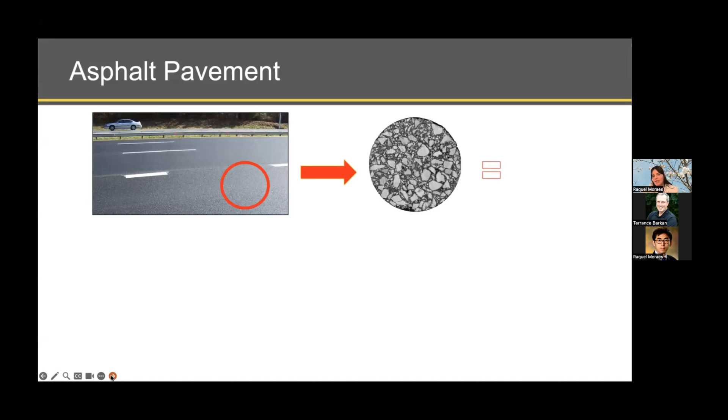Before starting, I would like to clarify some of the names I'll be mentioning today in the presentation. I would like you to see on this picture, this is a road that you drive on every day, right? So you see here this is what we call the asphalt pavement. If we zoom in on this asphalt pavement, you would see something like that, where you can clearly see a black component and several rocks. And this is what we have, when we say in the mix design, what is used to build a road.

These are the 5 components used in an asphalt pavement. We have the black component, that is the asphalt binder. We have mineral filler, 2 types of aggregate, fine and coarse, and air. When I mention today what was evaluated, I'd like you to understand that we incorporated the graphene into the black component of the asphalt pavement, what we call the asphalt binder. So when I mention what was evaluated, we included the graphene products into this component here, that is the asphalt binder.

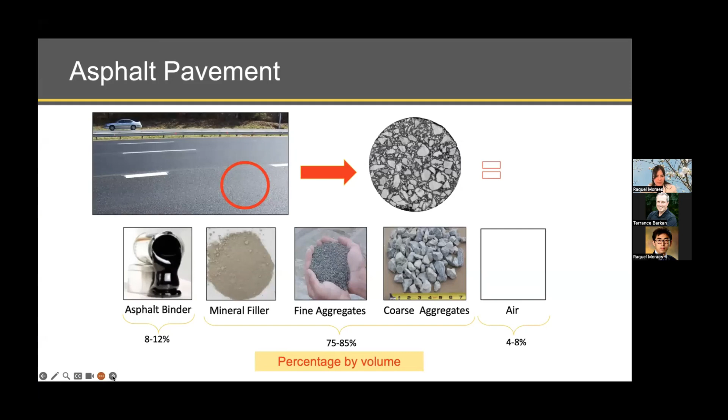The materials evaluated in this study were 1 base binder with a performance grade of 64-22. We evaluated 4 different graphene products at 3 different dosages, 1, 2, and 3. Here we have an illustration of the products utilized, and we call these additives 1, 2, 3, and 4, so we cannot disclose any product name.

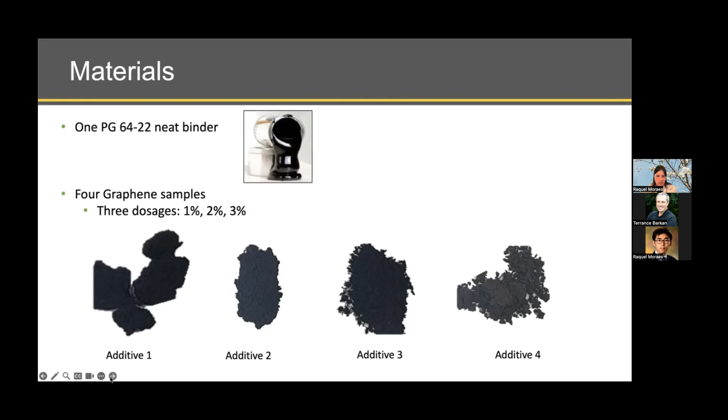Here we have the testing plan used for phase 1 evaluation. I would like to clarify that the whole goal of phase 1 was for us to become more familiar with how these products work and how they can be worked with in the lab. We also use a standard Superpave grading system to evaluate the behavior of the product, so we want to initiate our knowledge on the product before moving forward with other steps to perform a more complex evaluation of the additives. But before moving to that, we need to acquire the basic knowledge of how these products work and how we can work with them in the lab, and so forth.

So you can see here we have 1 asphalt binder, and for each graphene product, we evaluate 3 different dosages. We evaluate the material when we call it unaged, meaning we have the additive, we blend it with the asphalt binder, and we evaluate properties of that material without submitting the final blend to any type of oxidative agent. Then we perform 2 types of aging, and I'll be discussing this in detail every time I disclose the results obtained for each of the testing. We have what we call a short-term aging and a long-term aging. So in synthesis, what we evaluated here was the rheological properties of the asphalt binder modified with the graphene additives.

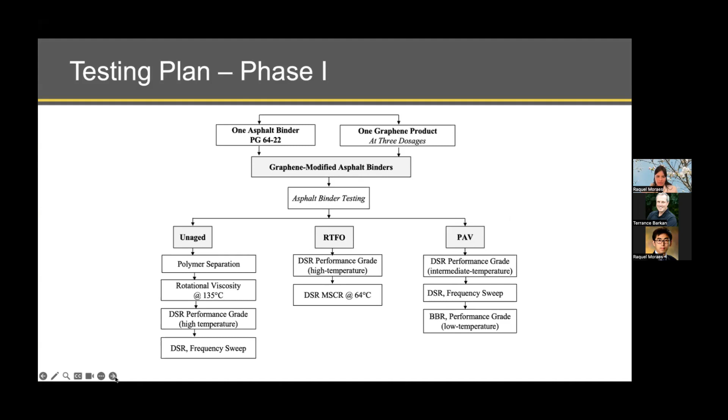The first test we evaluated was the storage stability test. It's an ASTM standard used to evaluate the tendency of a polymer to separate from an additive that is incorporated into the binder.

Following the storage stability test, we perform a softening test to see the tendency of the specific additive to be separated from the asphalt binder. The test is pretty simple.

As you can see in this illustration, we have the blend of the asphalt binder with the polymer or additive, in this case graphene. The materials are stored in a cigar tube, an aluminum tube, as shown in this picture. After conditioning at cold and room temperatures, we separate the top and bottom portions of this tube and evaluate the properties of the binder on top and bottom.

The property mentioned was the softening point, as you can see here. What is the softening point? It's an indication of the fluidity of the binder, meaning the temperature where the binder will start to flow. Why is this property important?

Imagine we have a pavement located where the environment temperature is 40 Celsius. We want a binder that has a softening point higher than 40 Celsius, meaning that material is not going to be soft at that specific environmental temperature.

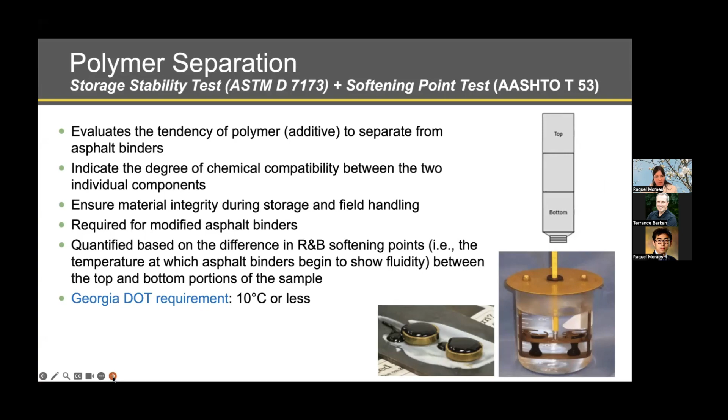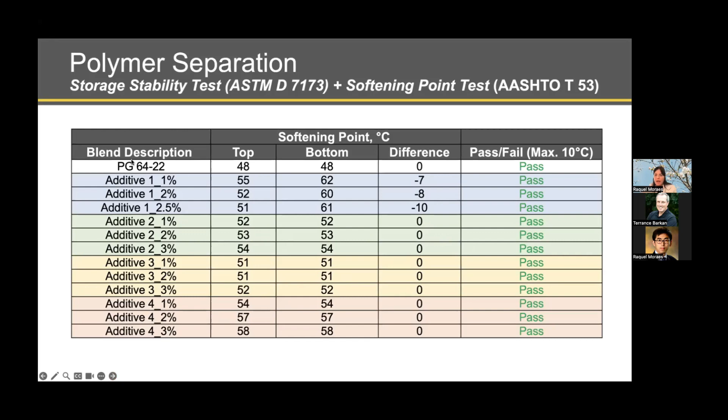As you can see in this table, for all the additives at the three dosages evaluated, none of them give a difference between top and bottom portions higher than 10 Celsius. For additives 2, 3, and 4, all show actually a difference of 0, so no separation. The only product that showed a higher tendency for separation was additive 1.

Now I'm going to cover what was evaluated in terms of rheological properties of the blend of the asphalt binder with the additives. We use what we call the Superpave Performance Grade system protocol for evaluation of these binders.

Basically, the system targets four specific properties or behaviors to be analyzed for the materials: production, rutting performance, fatigue cracking, and thermal cracking. For each of these targets, we have a specific testing protocol, aging protocol, and thresholds that are evaluated to grade a specific asphalt binder.

For production temperature or production properties, we use a rotational viscometer at a temperature of 135 Celsius. For evaluation of rutting properties, we use a dynamic shear rheometer, considering the material at the original state and after a short-term aging in an oven.

Then we evaluate fatigue cracking, also using a dynamic shear rheometer, but now the material is long-term aged. Then we evaluate thermal cracking, the behavior of the properties of the asphalt at lower temperatures, for which we use a bending beam rheometer, with the material also long-term aged in an oven.

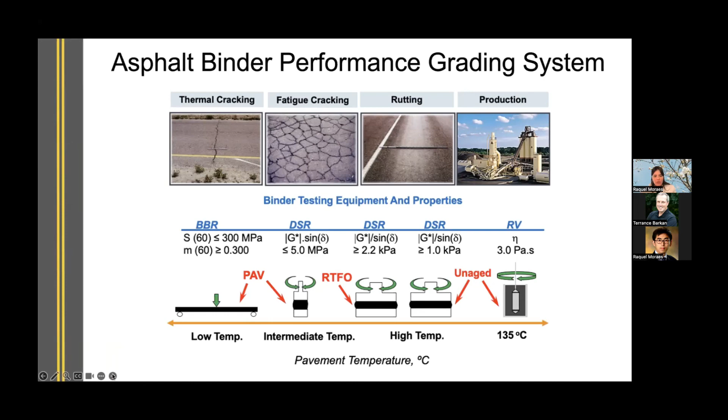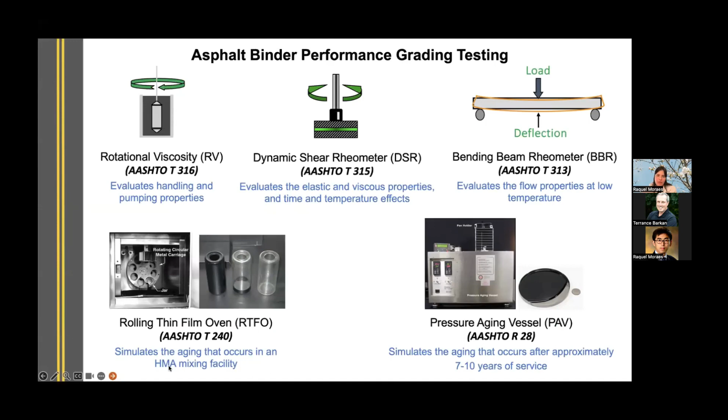Here I will show you the testing apparatus for each of the properties previously described. For rotational viscosity, we use a Brookfield rheometer, and the test is performed in accordance with AASHTO T316, where we evaluate the overall handling and pumping properties.

This is an important property we always consider evaluating, especially with additives, because we want to see how the workability of the binder changes after incorporation of the additives, and whether this would somehow differ from what is expected as common behavior in a plant.

Then we use the dynamic shear rheometer, AASHTO T315, to evaluate both the elastic and viscous properties of the asphalt binders at different times and temperatures. The bending beam rheometer per AASHTO T313 was used to evaluate flow properties at low temperatures.

Below in the slide, you can see the two aging protocols considered in the study: a rolling thin film oven per AASHTO T240 that simulates the aging occurring in a hot mix asphalt mixing facility, and the PAV, pressure aging vessel, per AASHTO R28, that simulates the long-term aging of the pavement after being exposed, let's say, between 7 and 10 years on a road.

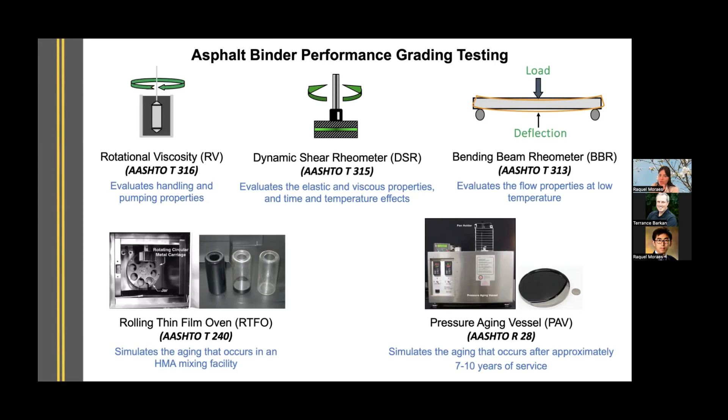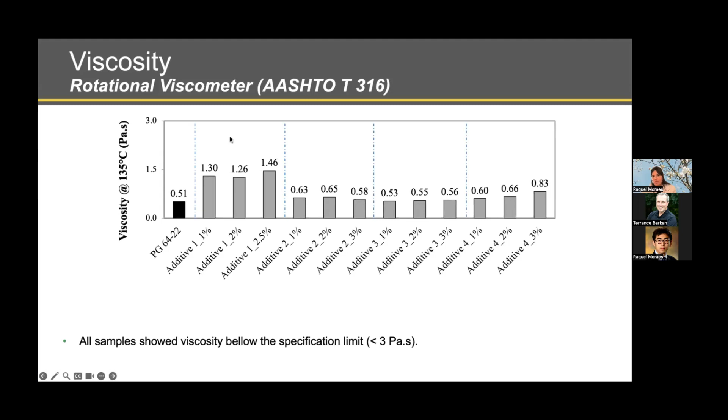First results to present are the viscosity, measured with a rotational viscometer. Here on black is the neat binder, the base binder evaluated without any graphene. On the following columns in gray, you see the binder modified with each graphene product. For all the additives at the three evaluated dosages, the final viscosity was below the specification limit of 3 Pascal second, which is a very positive result.

Then we evaluated the Superpave Performance Grade of the binders. As mentioned when describing the materials, we used a PG64-22 binder. This means these two specific temperatures are the expected temperatures where that binder will perform well: the first is the higher temperature the pavement can stand, and the second is the lowest temperature. When we incorporate additives to the binders, we use a terminology called grade bumping, where we can increase one or two of these temperatures, or both simultaneously, to target traffic speed and volume. Generally speaking, the bigger the difference between these two numbers, the better the performance of the binder.

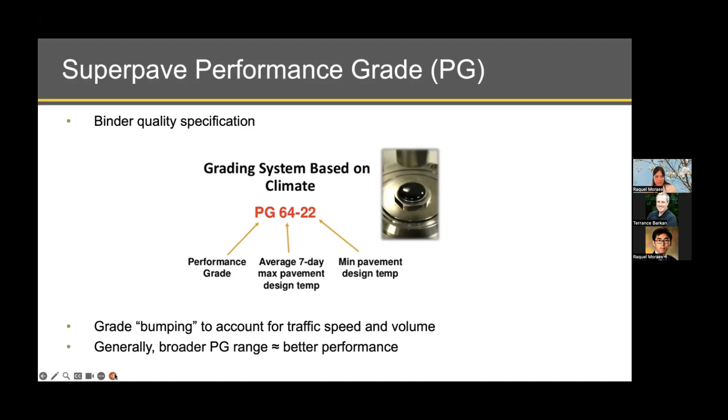Here are the results of the high temperature performance grade of the asphalt binder base binder and the binder modified with graphene additives. The number indicated on top of each column is what we call the pass-fail temperature, the maximum temperature a specific asphalt binder could hold. Some of the binders presented a slightly lower pass-fail temperature than the base binder, but as we increased the dosage, that trend changed. We did not see a specific decrease in the high temperature performance after incorporation of the graphene. Overall, the trend was that after the graphene additives were incorporated, in terms of high temperature performance, we saw an improvement in rutting resistance.

As mentioned in the previous slide, for some of the additives we saw one grade bump. Initially the binder was classified as PG64, but after incorporation of the graphene, the binder ended up being a PG70. For some of the binders, specifically additive 2 at 1% and additive 3 at 1% and 2%, no change in the PG grade of the binder was observed. It remained 64.

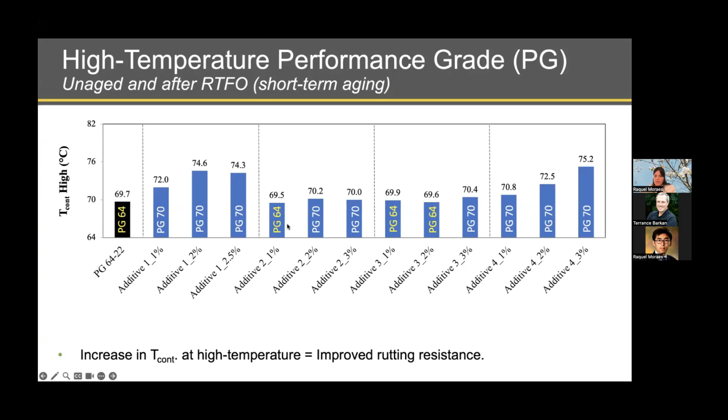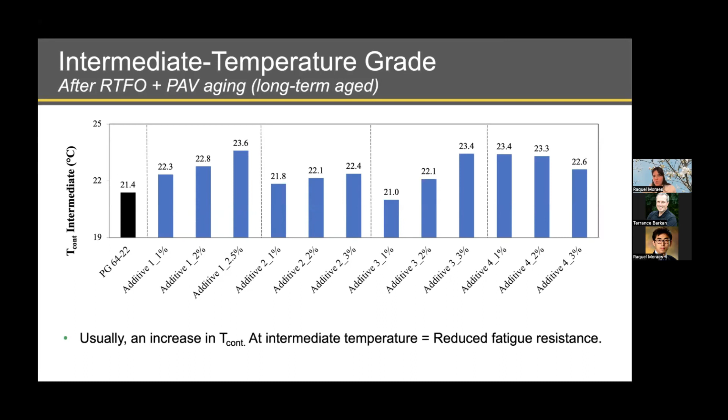Then we evaluated the properties at intermediate temperature after the binders were aged in the RTFO and PAV. Here in black is the base binder and in blue the graphene modified binder. For this testing, we wanted the pass-fail temperature to decrease, in terms of improving the properties of the base binder. All of the graphene modified binders show a pass-fail temperature higher than the base binder, with the exception of graphene additive 3 at 1%. However, the change was not very significant, meaning the overall contribution of the additives was not so detrimental.

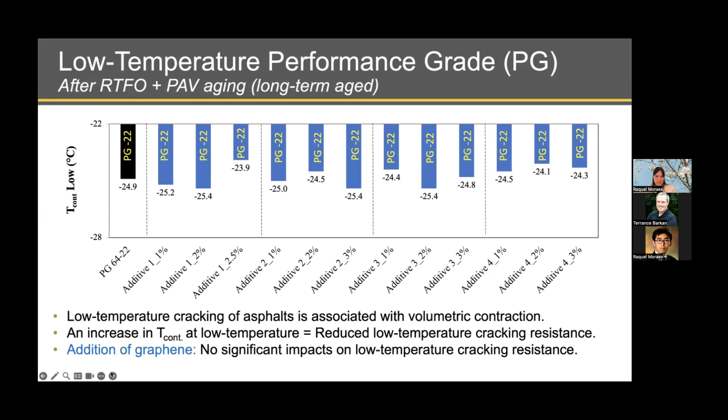Then we evaluated the low temperature properties of the base binder and the graphene modified binders. The same principle used for high temperature applies here for low temperature: we see the pass-fail temperature and the overall effect of the additives on the final PG grade of the binders. Usually, if this pass-fail temperature increases, becoming more positive, we relate that to reduced low temperature cracking resistance. Some of the additives did increase the pass-fail temperature of the base binder, while some decreased it slightly, with the difference not being significant. All final PG performance grades remained -22, as with the base binder. So the overall conclusion regarding low temperature PG was that the addition of graphene had no significant impact on the low temperature cracking resistance of the base binder.

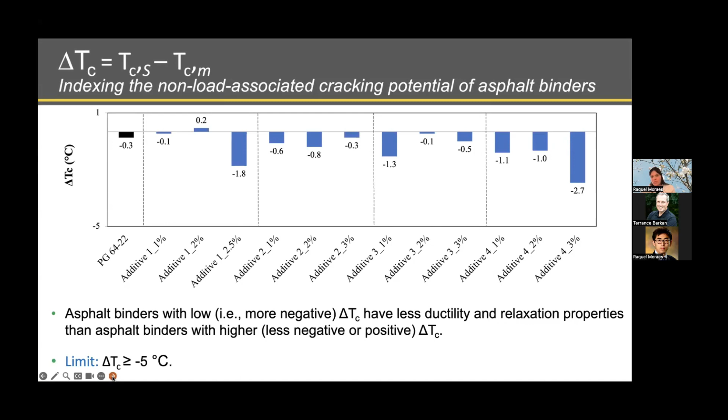Another parameter used to evaluate binders at low temperatures is called delta TC, where we use a difference between stiffness and relaxation properties at low temperatures to see the tendency of specific binders toward cracking. Different departments of transportation have different limits for the delta TC threshold, but overall what we want is a delta TC higher than or equal to -5°C for classifying a binder, since within this range the potential for cracking is decreased. Overall, the graphene binders decreased the delta TC of the base binder, but that result was not very significant, and none of them got even close to the threshold of -5°C, indicating relatively low potential cracking susceptibility.

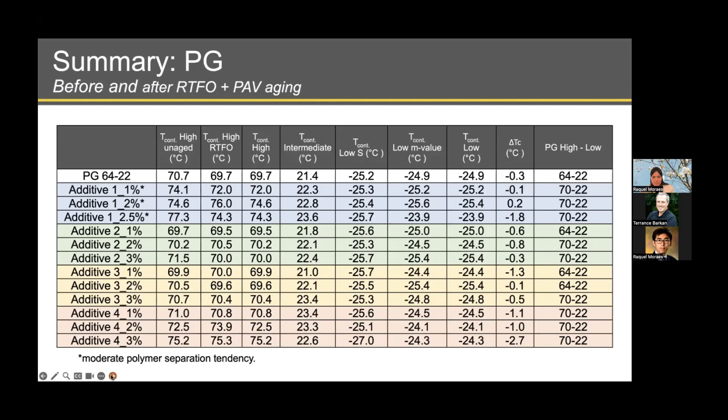Another test that was used to evaluate the graphene-modified binders was the multiple stress creep and recovery test, performed in accordance with AASHTO M332 and conducted on short-term aged asphalt binders, where we can see the creep and recovery of the binder.

So basically we apply creep and let the binder recover and see its response. We have two outputs from the test: percentage recovery to see the elastic contribution, and non-recoverable creep compliance, JNR.

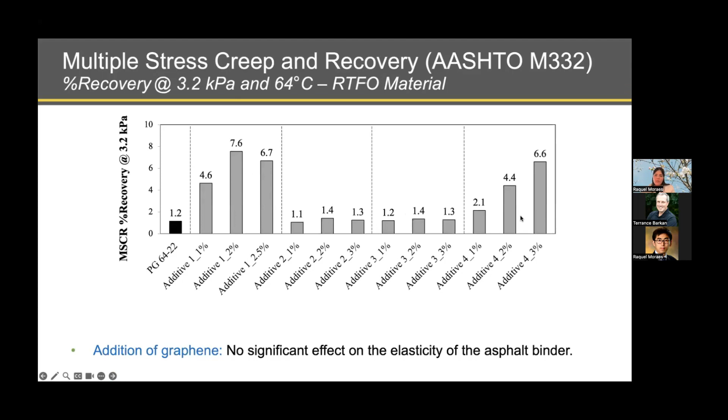We can see that for additive 1, we saw a slightly higher percentage recovery in comparison to the base binder, as well as for additive 4. But this is related to the fact that, as indicated on the previous slide, these specific binders were harder in terms of JNR than the base binder.

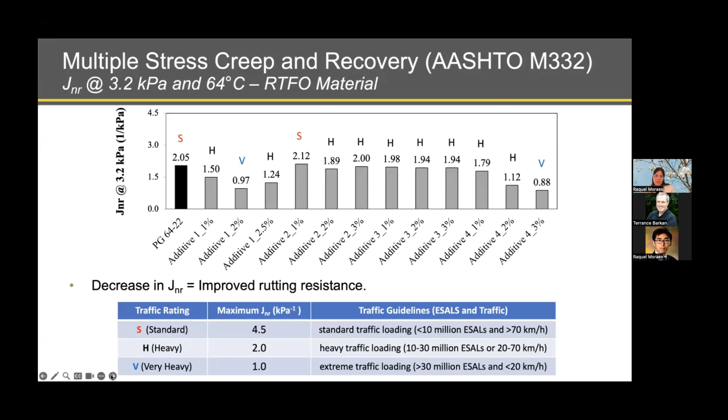And lastly, the last parameter that we used to evaluate was the glover-rowe parameter, this GR here. This parameter is obtained from dynamic shear rheometer master curves, where the binder is tested at several temperatures and several frequencies, and we use this specific parameter to see the ductility and block cracking resistance of the binders.

What has been seen and proved by field data is that when the binder starts to get aged or more oxidized, we see an increase in the glover-rowe parameter, therefore an increase in the cracking potential or cracking susceptibility of the binders.

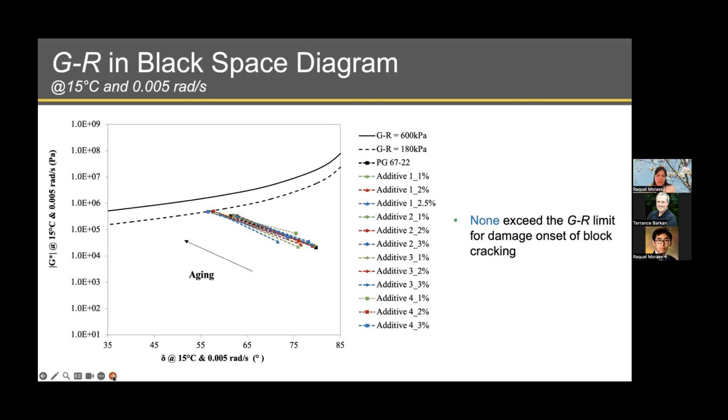And the aging protocol used for evaluation here, as indicated in the beginning of the presentation, was the standard aging procedure used for grading or quality assurance of the base binder: 20 hours of PAV aging that simulates between 7 and 10 years of the pavement being in the field.

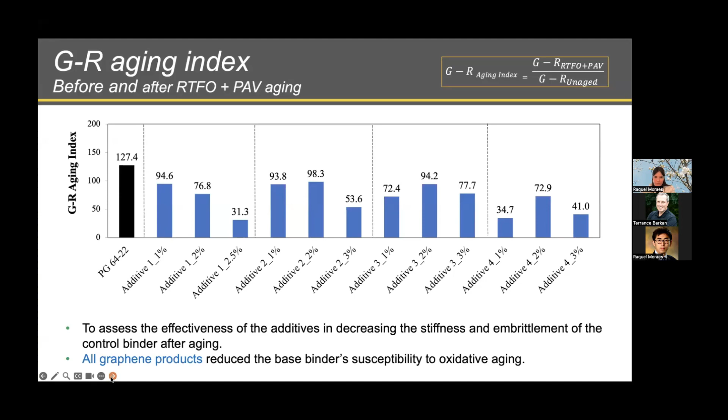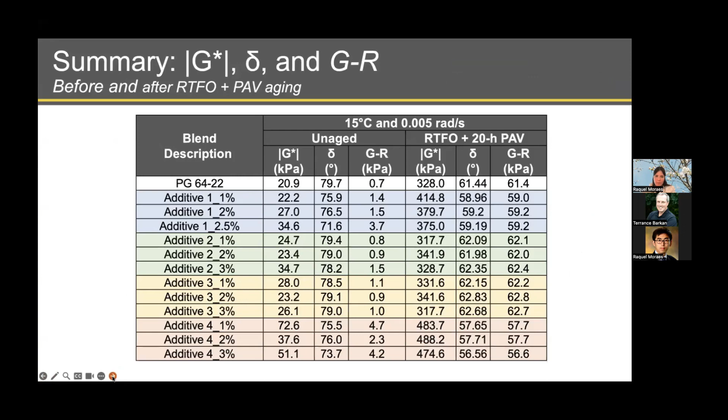So overall, from what was presented today, we saw that for all the additives evaluated in this study, up to 3% of graphene was positive. No issue was observed regarding storage stability, meaning that none of the additives at dosages up to 3% showed a tendency for polymer separation, meaning that if this blend of binders were stored in a tank, we wouldn't have separation between the graphene and the binder.

The only one that showed a limit of 10 Celsius degrees between top and bottom portions after the storage stability test was additive 1, where we saw that for that specific additive, the maximum percentage that could be used for this specific binder would be 2.5%.

We saw that for all the additives at dosages up to 3%, there was no negative effect on viscosity, where all the blends show viscosity results at 135 Celsius degrees way below the limit of 3 Pascal-seconds.

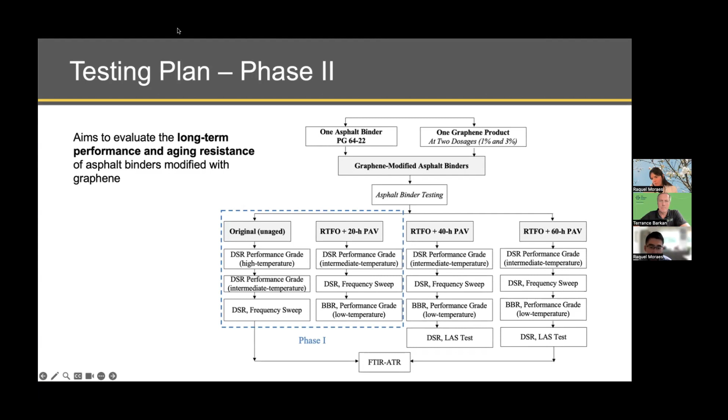I guess the only thing I would add at this point is to tie back to the concluding slide you showed earlier, saying based on these preliminary results, we saw improvement in rutting resistance and also improvement in aging resistance. This is something we discussed with Terrence before. Right now, at least in the United States, the primary distress in asphalt pavements is cracking. If we go back about 25 years, our industry was struggling with rutting, which is the deformation distress. But now we don't have rutting issues; we are having cracking issues, which have a lot to do with the quality of the asphalt binder—aging plays a significant role.

So the reason I want to mention that is, if we want to further expand the path of looking into the use of graphene in asphalt, I think we need to focus more on the cracking side, because that is the problem the industry is facing. That's something that's going to be of more interest to state DOTs or non-state highway agencies. They will ask us, if I use this material, how will that help with cracking performance? And based on these phase 1 results, the improved aging resistance is very promising, since aging has a lot to do with cracking.

So that's why the next phase, we strategically scope the work to focus on the aging benefits. If this is something that can really work out, it has the potential to improve the cracking performance, and that's something the asphalt industry really wants to pursue.

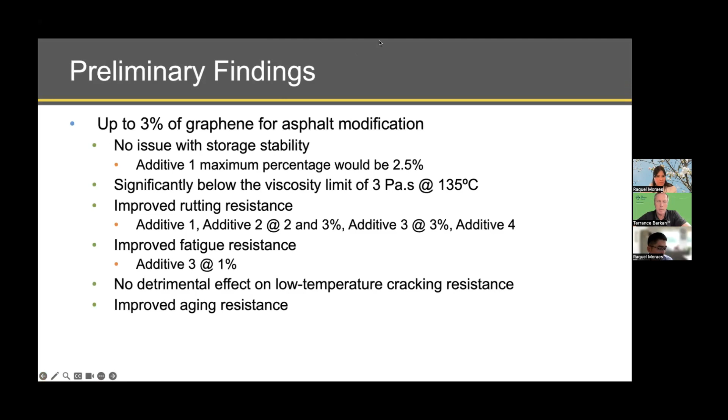Excellent. Well, thank you both for the presentation. We have quite a few questions, and Raquel, if you don't mind, maybe we'll just stop sharing, because a lot of the questions I don't think we have to refer back to the slides to answer. But let me go through some of the questions we had. There's quite a few, which is excellent.

There have been a couple of questions about what graphene was used in the study. We had 4 different samples here, and not everybody on this call is going to be familiar with graphene. Graphene comes in many different types and forms: graphene nanoplatelets, graphene oxide which has oxygen added to it on the surface or sides of the particles. These are nanoscale materials as well.

In the study, with the 4 different samples, we had graphene oxide, a modified graphene oxide, and a graphene nanoplatelet - different types of material. I think that's very important to understand because the 4 materials performed fairly similar to one another. We didn't see huge deltas where one performed really well and one performed poorly. So that's the answer on the graphenes that were used.

Raquel, you made a comment about dispersing and adding the graphene to the materials being easy to do, which in many cases with graphene is the opposite - dealing with this nanomaterial and dispersing it in a host resin system, for example, is quite difficult. Can you say what method was used to disperse it, and what evidence do you have that it was evenly dispersed throughout the matrix?